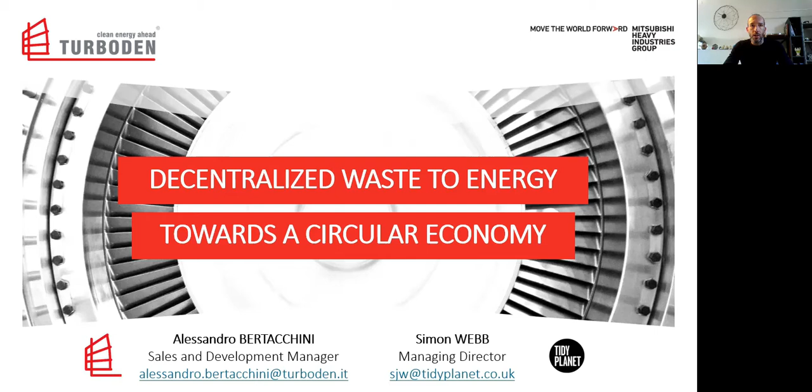I'm Alessandro Bertacchini, Sales and Business Development Manager in Turboden. Very happy to be here virtually with you today, and I hope you will enjoy this presentation about the decentralized waste to energy. Let me take you through the agenda first.

I will start with a brief introduction about Turboden and talk a little about circular economy and waste to energy first. Then I will describe the organic Rankine cycle technology and how it is used in decentralized waste to energy plants. At some point, I will give the floor to Simon Webb, Managing Director in Tidy Planet. With Simon's help, we will see some technical solutions for RDF and SRF and a couple of case studies. At the end, both Simon and I will be available and happy to answer any question you may have.

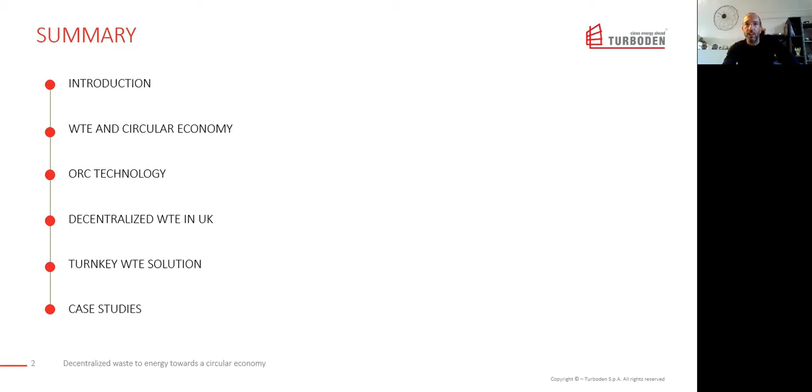Okay, lots of irons on the fire, so let's start straight away with some information about Turboden first. Turboden was founded in the 80s by Mario Gaia, a professor at the Polytechnic University of Milan. Nowadays, Turboden is a global leader in the design, manufacture, and maintenance of organic Rankine cycle technology for heat and power generation. Size of our ORC ranges from 500 kilowatt electric up to 20 megawatt electric with a single shaft turbine.

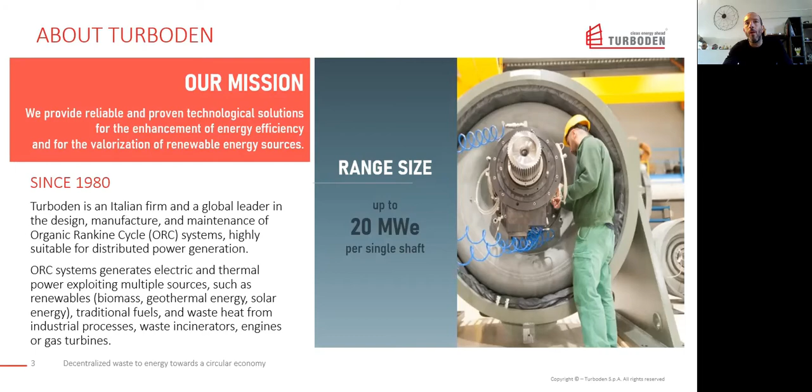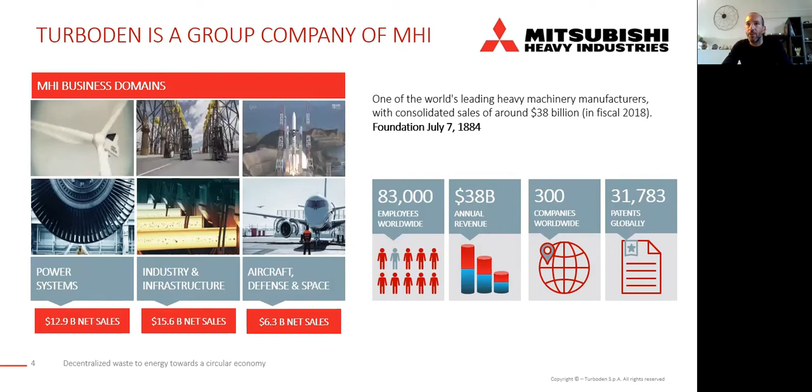Since 2014, Mitsubishi Heavy Industries owns 51% of Turboden shares. As part of the power system domain, we in Turboden leverage the strength of MHI Group as well as the technical and financial support. We are present in more than 45 countries with about 400 plants in many different fields of applications. We are in renewables, such as biomass and geothermal, for instance, industrial heat recovery, combined cycles with gas turbines and engines, and waste to energy, which is the topic of today's presentation.

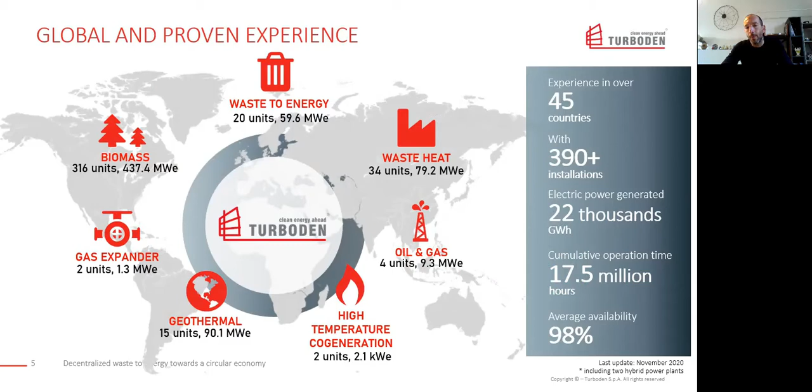Average availability among our fleet is 98% with almost 18 million working hours and 22,000 gigawatt hours of power generation in total. Most of our clients have an after-sales contract in place, which we take care of firsthand. And that gives us a lot of experience on our system. Our presence in the UK is also important, with 13 plants in operation and 2 more contracts in execution as we talk. Both are due to start up by mid of this year.

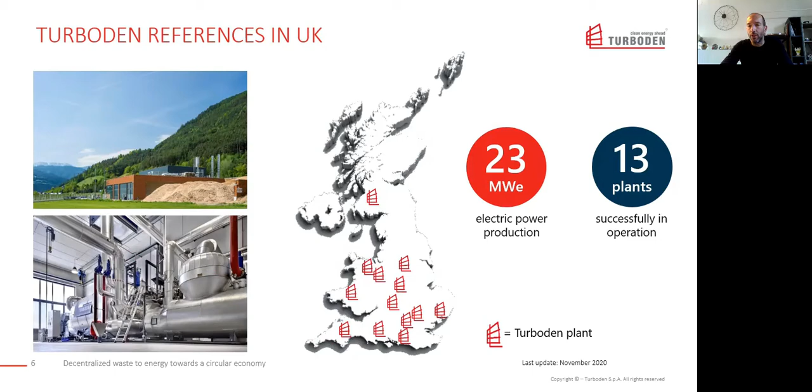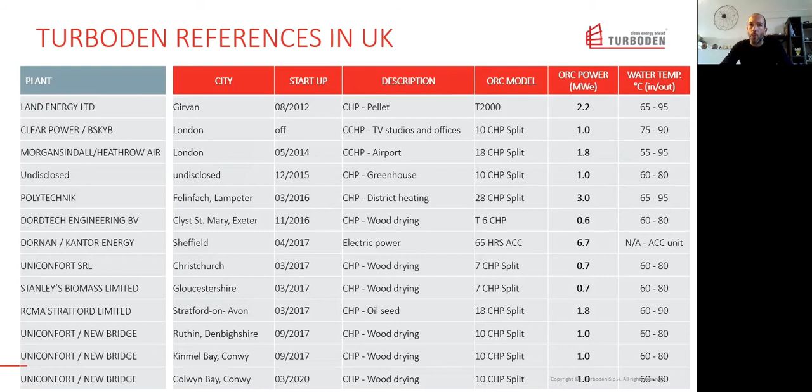Most of our references in the UK are CHP systems between about 1 and 3 megawatt electric. The largest power plant is in the Sheffield area, and it's a 6 megawatt electric power only ORC turbo generator from waste wood and RDF combustion. Okay, that was a quick company profile. Let's jump now into the main topic, circular economy.

We hear a lot about it since in 2018 the European Union adopted the circular economy package. According to the waste hierarchy, the priority is to adopt new technologies and policies that minimize waste creation first. However, there will always be some residual waste left, which is contaminated or too low quality to be recycled. For this reason, the challenge is to find out how to keep the material cycles clean, how to securely treat the waste left after recycling, and how to use the value in residual waste. Waste to energy answers those questions, helping to keep the circular economy clean.

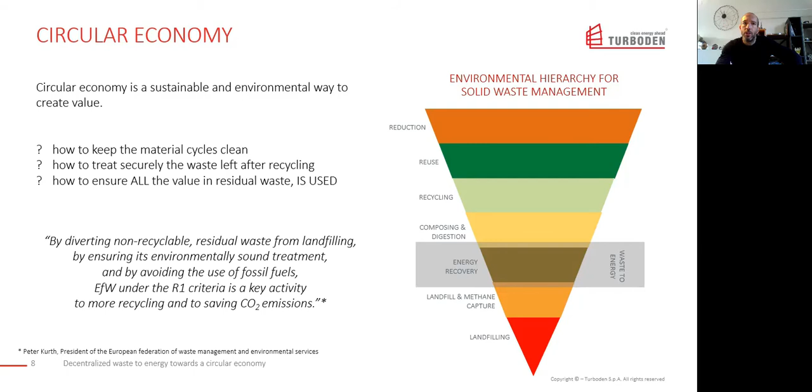In fact, the main purpose of waste to energy has always been volume reduction and sanitization. Now, it is also more and more about waste valorization. With waste to energy, it's possible to recover more than 90% of the energy embedded in waste, and at the same time improve the recycling quality and rates, because metals and minerals can both be recovered from the bottom ashes. In addition, waste to energy contributes to fight climate change and global warming by diverting waste from landfill and by substituting fossil fuels in energy generation.

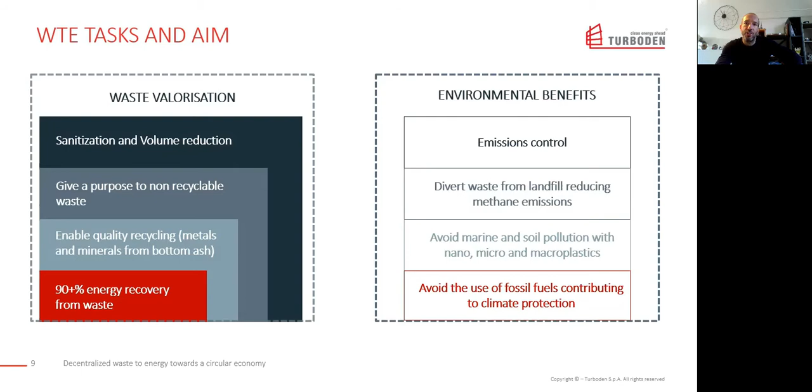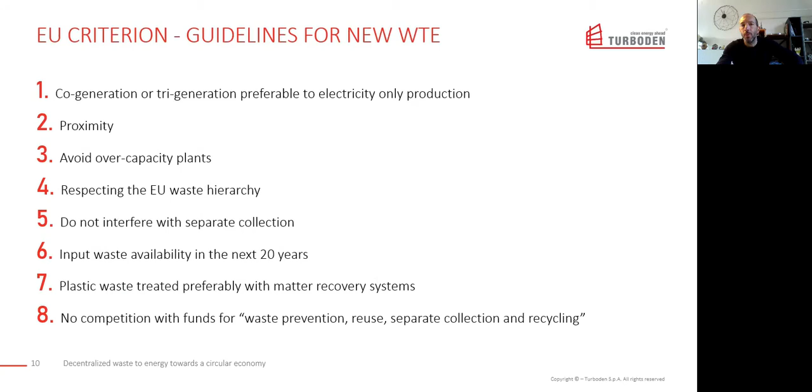Also, by prioritizing separate and selected collection of municipal solid waste, the residual waste availability will most likely decrease over time. That means new plants should be designed to treat smaller quantities of waste with a higher low heating value than in the past, as a consequence of the efficient sorting and mixing with special waste streams. So to sum up, along with traditional energy from waste plants, a modern infrastructure of smaller and efficient plants placed in strategic locations should be developed.

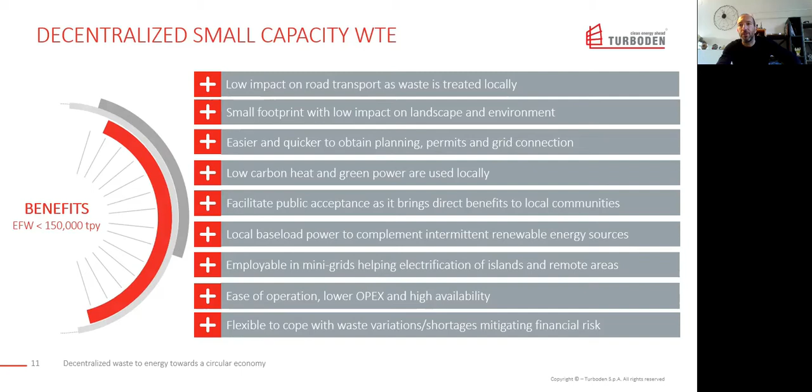The immediate advantage of that will be to reduce the costs of waste logistics, as well as the impact on road traffic and CO2 emissions. Also, with a small footprint and lower chimney stack, the impact on landscape is minimized, and it may be faster to get planning and authorizations. Communities could eventually become self-sufficient in their heat and power requirements and maybe have a higher perception of the direct benefits brought to them, which is not really the case for big plants. Finally, being able to valorize both heat and power together with high availability and low operational costs could guarantee faster returns to shareholders.

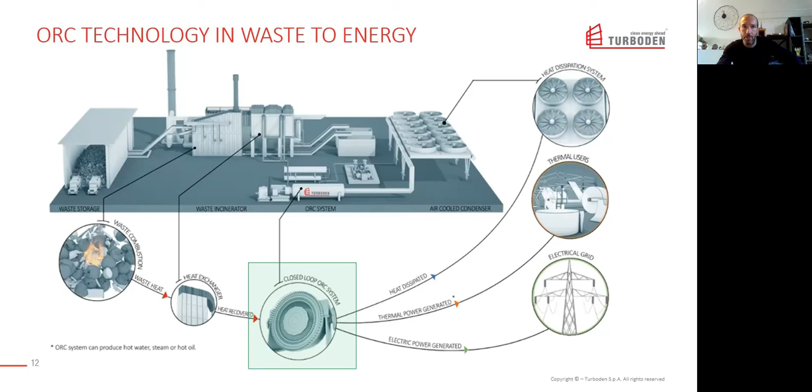Okay, I would like to talk now about the organic Rankine cycle technology. That is what we do in Turboden. The picture shows how easily our ORC turbogenerators integrate in waste-to-energy plants. In a few words, the heat available from waste combustion is recovered and exploited to generate thermal power and electricity. But let me explain to you more deeply how, in detail.

The heat available from the primary thermal treatment is collected and conveyed to the ORC system by an intermediate heat carrier, which in most cases is thermal oil. In the evaporator of the ORC, the working fluid is vaporized to expand into the turbine for power generation. Exiting the turbine, the vapor goes into the regenerator for internal heat recovery first, and then it is cooled down and condensed. Finally, the working fluid is pumped back into the cycle again.

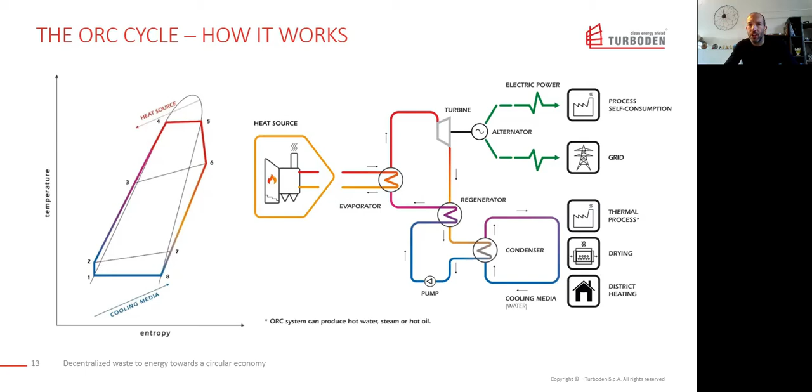The whole system is a closed loop designed to be durably tight, avoid area classification, and ensure negligible fluid replenishment. As you can see, condensation can happen at different temperatures, depending if the priority is the electrical efficiency or heat cogeneration for heat purposes.

Okay, so what is the difference with a steam turbine? Here are the main differences with a traditional steam Rankine cycle. First of all, ORC uses an organic fluid instead of water. The main thermodynamic difference is that water steam must be superheated while organic fluid vapor doesn't. Organic vapor expands in the turbine without liquid formation, the reason why there is no risk of blade erosion.

There are also some practical differences. In a steam turbine, the water quality is an issue and a water treatment plant is required and is critical most of the time. Due to the pressure involved, a steam turbine needs to be supervised continuously by patented personnel, while ORC is automatic and there is no need to attend operations.

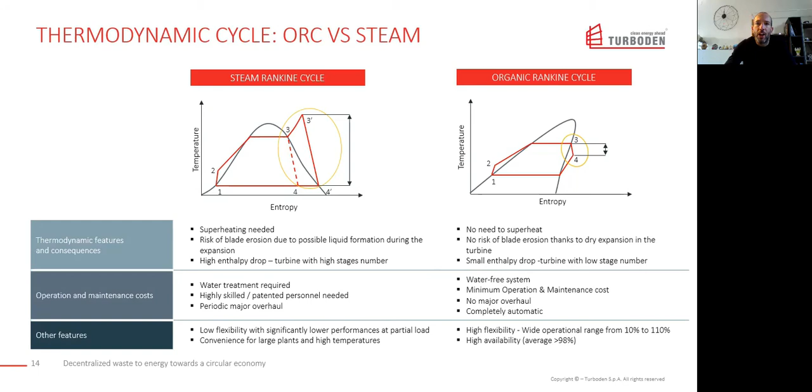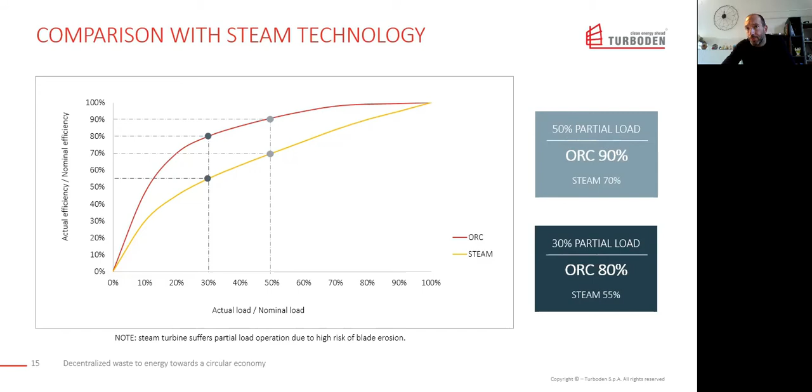Another difference to mention is related to the low flexibility of the steam turbine, as shown in the next slide here. This graph compares flexibility and electrical efficiency behavior at partial load for the two systems. As you can see, when ORC is fed with half of the load, for instance, the electrical efficiency is as high as 90% of the nominal one and stays at 80% when the input drops down to 30%, let's say. Steam technology, on the contrary, shows a stronger decrease in efficiency when not working at design conditions.

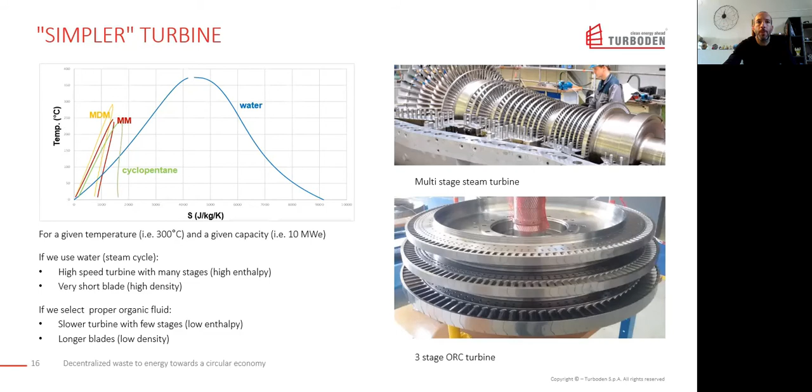Okay, I'm done now with the technical slides, but before giving the floor to Simone, just a few words about waste management in the UK, or at least how I see things from here, from Italy. Everybody recognizes the UK has done a great job to reduce waste landfilling since 2000-2001. However, the amount of waste sent to landfill in England rose by 4% last year, which is the highest figure in the past 10 years.

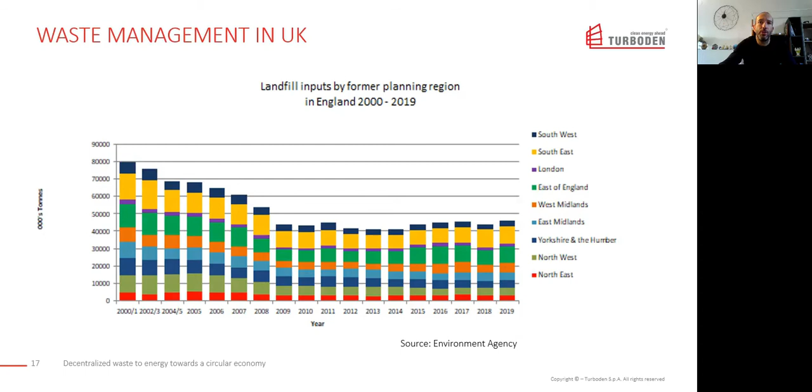I understand that may be due to the increased cost of waste exports; at least I read that there might be several reasons that altogether contribute. For instance, I read about the taxes being imposed by receiving countries such as the Netherlands and import bans applied worldwide. There is also kind of a Brexit effect playing here, I think, with some uncertainty on the new legislative framework and duties being introduced, or on the horizon at least. And most recently, of course, the logistical impacts caused by the coronavirus pandemic, whose effects are yet to be clearly reckoned, I guess.

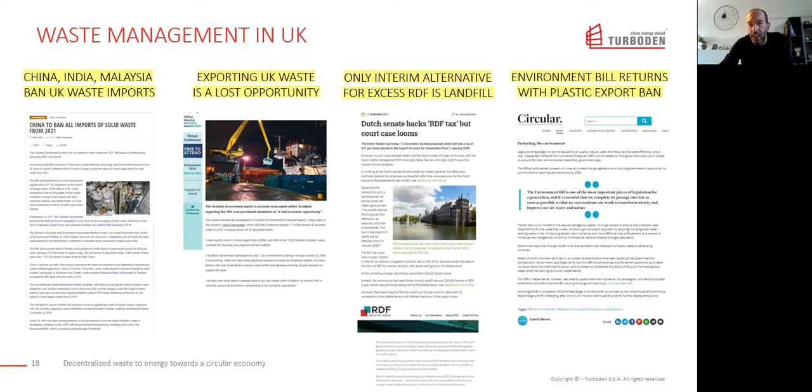So for all those reasons, an increasing number of organizations seem to be turning their attention to the value of waste, especially RDF and SRF, and decentralized waste-to-energy plants are perhaps a good, sustainable, and circular way to valorize the waste. We briefly saw already the advantages of having smaller plants, and I understand there are also some specific drivers that make this concept even more appealing in the UK. Here are some of the reasons, drivers, listed out. I'm sure you know them better than me, and I will be happy to discuss all that with you later, if you like.

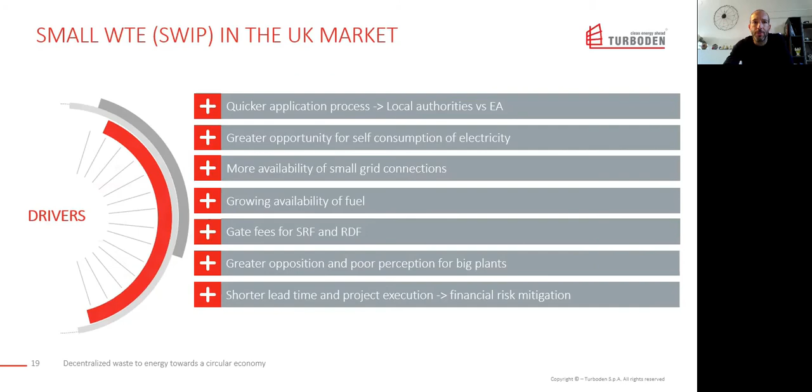We are a distributor for Turboden and Sugimat's exclusive distributor in the UK, and have worked with them for the last 6 years, developing their presence in the UK market, following our first project that we completed together in 2016. This project was for Gatwick Airport, where we designed and installed a turnkey waste-to-energy solution for 15 tonnes a day of non-recyclable wastes that were recovered from the airport's recycling facility.

The system we installed processes and dries the waste from the airport's terminals that contains a lot of contaminated food wastes. This waste is fed to the IED-compliant Sugimat boiler, where it produces energy for the recycling facility. The RDF we produce on this site is very dry and has a high CV and high ash content, but very low bulk density, and is in many ways a more difficult fuel to use than many RDF materials. But with Sugimat support, this has been a great project to work on, and the system runs very well.

After Alessandro's presentation, I don't need to tell you about Turboden, other than their ORCs are perfectly matched with Sugimat's boilers in order to produce energy from waste. Sugimat have been manufacturing solid waste fuel boilers in Valencia for over 40 years. During this time, they've installed over 3,000 systems in sizes ranging from 30 kilowatts to 50 megawatts. Whilst their speciality is thermal oil boilers, they also produce hot water and steam boilers.

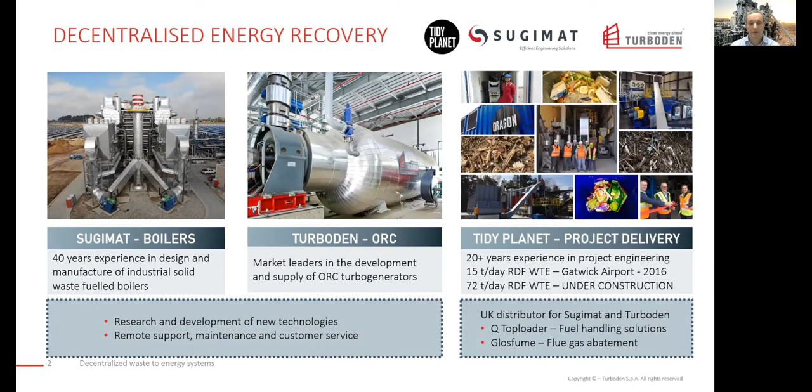Our role in this partnership is to bring the projects together and deliver them for the customer. We've over 20 years experience in project delivery in many areas, and for the last 10 years we've been working in the energy from waste sector. Both Sugimat and Turboden have a number of references for solid waste EFW facilities where the systems are connected together, and a list of references is in the table to your left.

In addition to our first RDF waste to energy project for Gatwick, we're currently working on 2 new RDF EFW facilities that will be in operation towards the end of this year. These projects will both use Sugimat's boilers and Turboden's ORCs. The first of these is a CHP project where all the heat and power will be distributed to a hospitality venue, heating and powering a number of properties on the estate, as well as the racecourse and racing circuit.

The second project is a replacement boiler to power an existing Turboden CHP system on a site that is struggling to find enough reasonably priced biomass to make its wood chip boiler viable. They've identified that the business case for the use of locally sourced RDF is far more sustainable, and we will be replacing the wood chip boiler for one designed specifically to meet their new requirements.

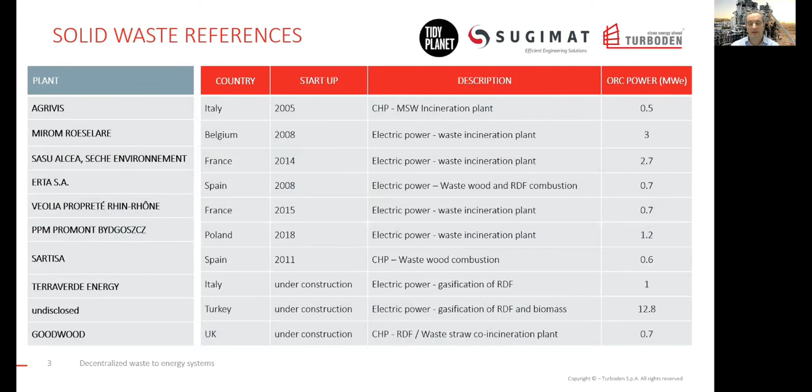I'd now like to explain a little bit about thermal oil boilers for those of you who may not be familiar with them. Like steam, thermal oil boilers operate at a much higher temperature than hot water boilers can. And although hot water can be used to power an ORC, it's not very efficient. For the thermal oil circuits connected to an ORC, we typically operate at 310 degrees centigrade and a pressure of less than 6 bar, which is the head pressure from the pump. With boiler efficiencies of up to 86% and fewer circuit losses, thermal fluid compares favourably to steam in many applications, particularly in small-scale energy recovery facilities like those we're talking about today.

Although most of the EFW systems in the UK are large-scale mass burn facilities, there's been a definite shift towards smaller-scale grate combustion solutions over the last few years, and this has prompted Sugimat to develop their business in this direction. Last year, Sugimat released their newest boiler design, the Horizon Plus horizontal boiler. This was conceived by Sugimat's technical director to solve the performance issues created by high ash content fuels such as RDF. Another recent development of Sugimat's is the computer vision control system, which replaces the need for regular manual observation of the combustion process.

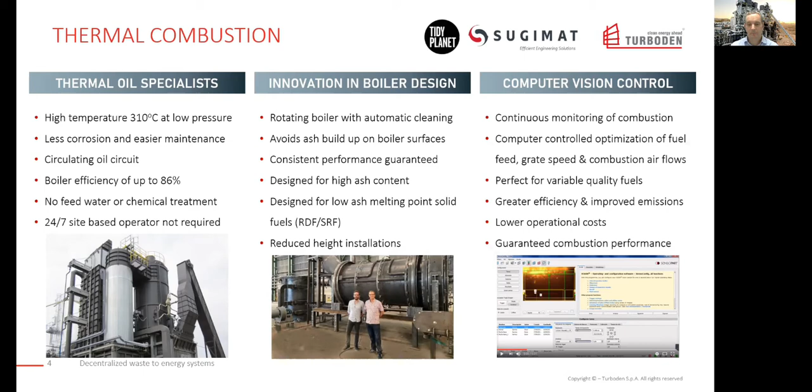Integrated into the boiler's controls is a high-performance image recognition system, similar to that in a Tesla car. This can recognize the difference between flame, embers and ashes, as well as the flame intensity, in order to automatically determine and control the combustion of the fuel. This is particularly important with waste-derived fuels, as they're quite variable and the combustion requires continuous monitoring and adjustment. Sugimat's system is able to manage all of the combustion parameters based on the conditions inside the combustion chamber and make corrections in real time instead of relying on a boiler operator to do so periodically. The benefits are lower emissions and improved combustion and efficiency.

In these boilers, we have a number of different grate and furnace designs, all of which are bespoke to the customer's requirements. For most solid waste fuels like SRF and RDF, they use an inclined step grate, as this is the proven solution for these materials. The furnaces are equipped with primary and secondary air and NOx-reducing flue gas recirculation. Typically, a preheating burner and computer vision systems will also be installed in the furnace.

After the furnace, an adiabatic chamber is installed to maintain the gas temperatures at above 850 degrees for at least 2 seconds, in order to keep the gases at the required residence time and temperature to ensure complete combustion and to comply with the Industrial Emissions Directive. This chamber is brick-lined and insulated to minimize heat loss, and the gases pass through here on the way to the first boiler, which is normally a single-pass radiant coil.

As the gases flow in an upwards direction through the coil, any heavy particles of fly ash that haven't fallen out in the adiabatic chamber will fall out here, and this minimizes the amount of ash reaching the second set of boilers. The radiant coil is able to operate at higher temperatures than the batteries, and the gases that entered at above 850 centigrade will leave this first boiler at less than 700 centigrade, as this is the upper limit of the heater batteries.

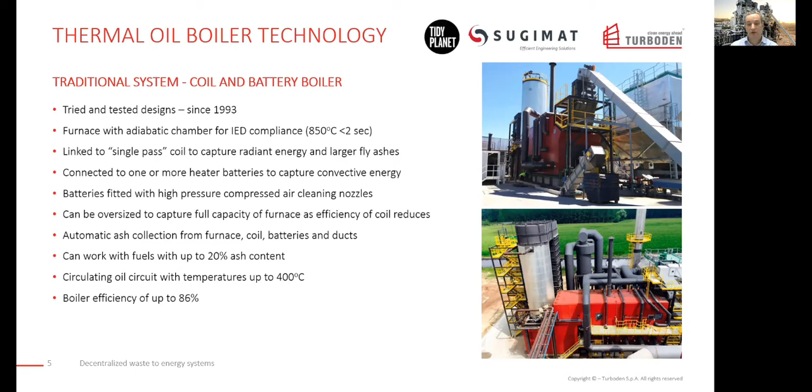All of the ash that's removed from the furnace, adiabatic chamber and the boilers is directed to the automatic ash cleaning systems and onto the ash disposal points, one of which can be seen in the center of the top picture. The vertical boilers are suited to fuels with up to 20% ash content and can heat thermal oil up to 400 degrees centigrade with an efficiency of 86%.

Sugimat's recently developed Horizon Plus boiler was conceived by their technical director in 2017, and after several years of development and testing, it was granted a patent in 2019. As you can see from the images, the boiler rotates on casters, which encourages any ash deposits that naturally fall off to follow the spiral of the tubes and make their way out of the boiler in the same direction as the gas flow. If the ash doesn't naturally fall off the tubes, cleaning media such as sand or aggregates can be introduced into the gas flow from the furnace, and these recyclable materials help to dislodge the ash from the coils and keep the boiler surfaces clean, which guarantees consistent performance of the boiler.

As this system is able to overcome the problem of ash sticking to the coils, it's possible to have a 3-pass coil where the gases flow past several sets of tubes rather than a single set, as in the single-pass design of the vertical boiler. This means that the design of the boiler is capable of recovering energy from the gases without the need for heater batteries. This brings a number of advantages, including stabilizing performance and efficiency, whilst eliminating the need for high-pressure compressed air cleaning systems.

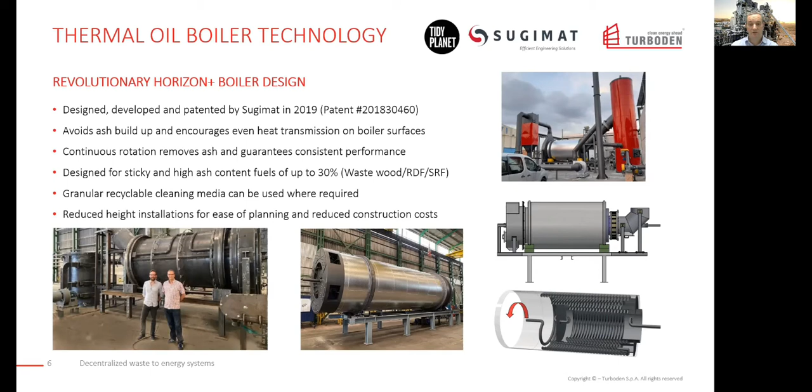The horizontal design reduces the height of the system, and it can be much lower than with the vertical design, and this means lower buildings, less cost, and potentially an easier route to planning approval. The Horizon Plus can operate at up to 310 degrees centigrade as required by the ORC, and notably it can still operate efficiently with higher ash content fuels of up to 30%.

I'd now like to move on to an example of a small-scale decentralized energy recovery facility that we're standardizing for RDF and SRF applications. With a maximum fuel input of 3 tons of non-hazardous waste per hour, the system falls under the Small Waste Incineration Plant Permitting Scheme in England and Wales.

Unlike larger scale systems, the SWIP scheme is permitted by local authorities rather than by the Environment Agency. And although the requirements of both schemes are the same, currently many local authorities are able to process the applications quite quickly and in less than 6 months, whereas anyone who's applied for a permit from the Environment Agency recently will tell you it's a far lengthier process.

As the calorific values of SRF and RDF are very different, with the same amount of fuel limited at 3 tons per hour, you can produce up to 12 megawatts with a high quality SRF, compared to around 6 to 9 megawatts with lower grade RDF.

At this size, Sugimat can produce both vertical and horizontal versions of the boilers, and both come with guaranteed availability of 8,000 hours per annum and efficiencies of up to 86%. The typical layout requires less than 2,500 square meters, which makes it easier to locate closer to areas that generate waste, which lends itself to decentralized solution.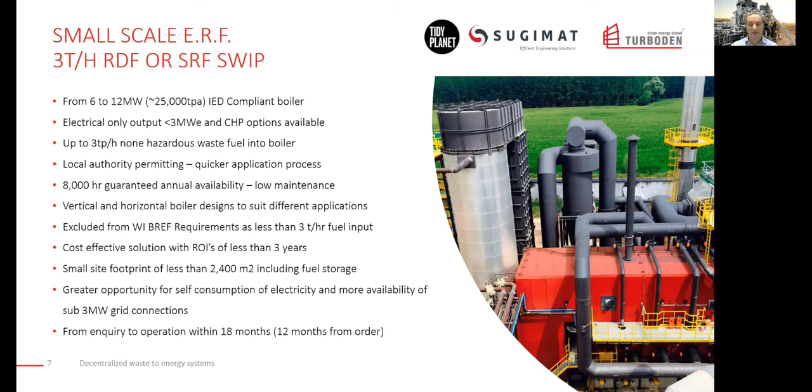As the electrical power output from the ORC is less than 3 megawatts, it's often easier to find a cost-effective grid connection at this size, which means it can be sited more easily than would be the case for larger systems. This makes it possible to go from inquiry to operation in less than 18 months.

Here you can see a mass energy flow of a typical RDF or SRF facility. With a good quality RDF with a calorific value of 14 megajoules per kilogram and limited to 3 tons of fuel an hour, you can produce around 9 megawatts of heat, which will generate 2.3 megawatts of electricity. If you compare this to SRF, which is a higher quality fuel, you can generate around 3.2 megawatts of electricity with the same quantity of fuel.

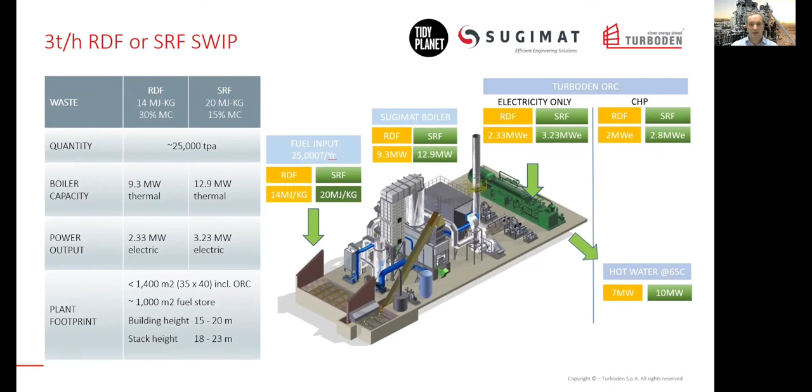Both of these systems use Turboden's high efficiency electricity only air-cooled condenser ORCs, where the rejected heat is dispersed to the atmosphere after condensing the ORC fluid. An alternative CHP version of the ORC would be able to produce up to 10 megawatts of hot water, as well as a slightly lower amount of electricity, and this is a preferable solution wherever the hot water can be put to good use.

Looking at a typical business case for a 3 ton an hour SWIP system using 25,000 tons per year of fuel, you can see it's possible to have a very strong return on investment. The gate fee for RDF varies around the country, and for this example I've used a good quality RDF with a calorific value of 14 megajoules per kilogram, which would attract a gate fee of around £90 per tonne, generating an annual gate fee revenue of over £2 million.

After the ORC and boiler's parasitic load has been deducted, you have 2 megawatts of electricity that can be used on site or exported to the grid, or even used to generate around 800 kilograms of road transport hydrogen, which is topical at the moment. We then deduct the annual reactive and preventative maintenance costs, which include the spares used over 10 years and the abatement consumables needed to comply with the emission regulations. Next, you have to consider the ash disposal costs, unless you wish to manufacture your own concrete products, which is permissible from this type of ash.

Finally, although it's possible to leave the system unmanned for 12 hours, we've allowed for personnel to supervise the system around the clock. With a budget of around £10.5 million for a turnkey EPC solution, excluding grid connection, site and civil costs, the return on investment is less than 3 years for sites that can use the electricity to reduce their own grid consumption, and less than 5 years for a site that exports their power to the grid.

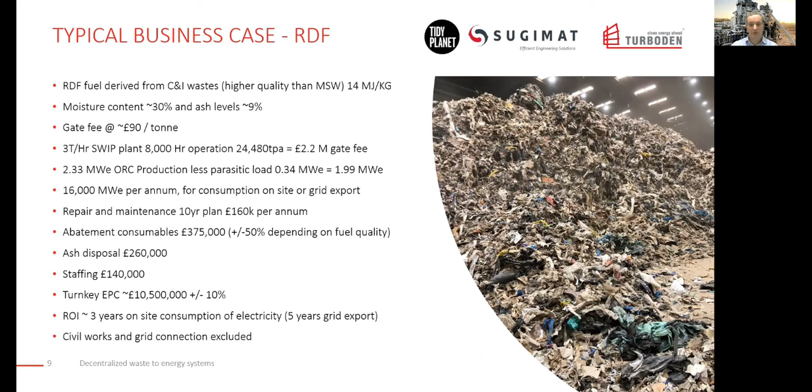When compared to RDF, many of the return on investment elements are similar to SRF, and the main difference with a higher quality fuel with a higher calorific value and a lower gate fee is that the benefits from these two income streams are reversed. As the waste has been further processed to produce the higher quality SRF, it costs more money to produce and so attracts a lower gate fee. However, as it is higher quality with a higher CV, you produce more electricity from every tonne you consume.